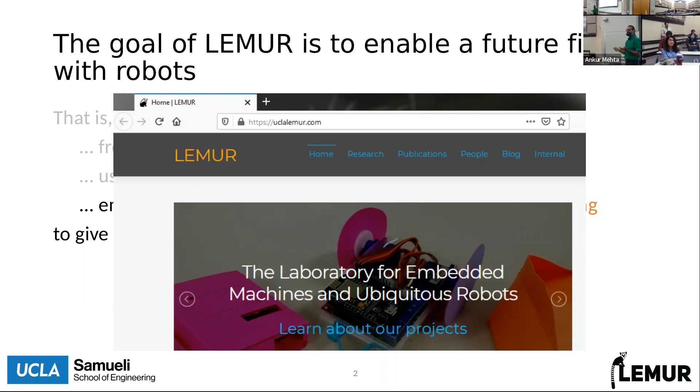And when I say all the other work, it's really the work done by my students. I just put a pretty face on all of this and come here and take all of their credit. So I'll be clear - everything in this talk is the work of my graduate and undergrad students that have been putting this together. Also, this is a good time to thank all the sponsors and ultimately taxpayers like you who send the money to government, who brings it back to us so we can work on all this stuff.

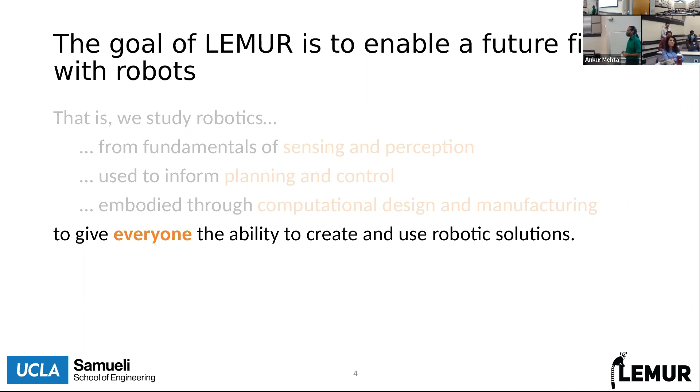Going back to this vision of our group, Lemur is there to try to democratize access, to get more people involved in the robotics story, to get people involved in the engineering process from start to end. This is where I'll start the first half of my talk, which is the motivation. Why is this so important? Why is this the driving feature that has influenced my academic career?

And like I mentioned, this is going to be a lot of social science, and I'll say I'm not a social scientist - I'm an engineer by training and by trade. So I'll present a lot of these things as an outsider looking in. This is going to be my interpretation of the data and information that comes through the social sciences field.

There's probably many other very reasonable, rational explanations for it, and my take is just one opinion. I'm happy to hear other opinions, and if you'd like more discussion, feel free to raise your hand. But this is going to be my view, coming from the perspective of an engineer who asks, what can I do about this? What abilities do I have?

This stems from the core issue of the gap, the divide between the haves and have-nots of society, and this divide is growing. We can look at it as a time rate in terms of income, where the highest earners make far more than the median or lowest earners. Integrating that over time gives accumulated wealth, and we still have the same problem: those who have wealth and income have a greater portion of the pie than ever before.

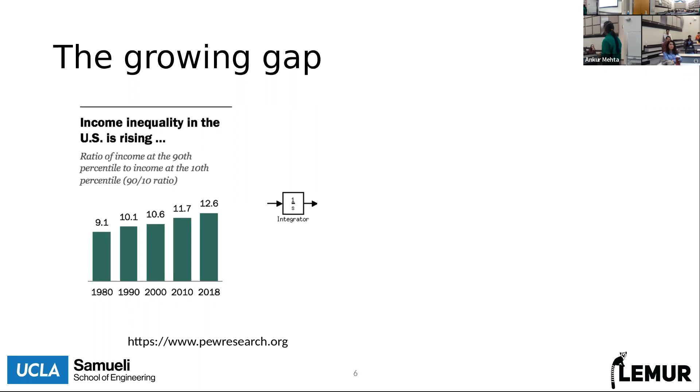But if you look at those who don't have, the bottom half of our society has even less than it's ever had before. These numbers are specific to the United States; if you look at the world, this gets very dire. There's always been some amount of inequality, and it's growing, but this is not just numbers, not just abstract concepts of money, wealth, and income. This has a real effect.

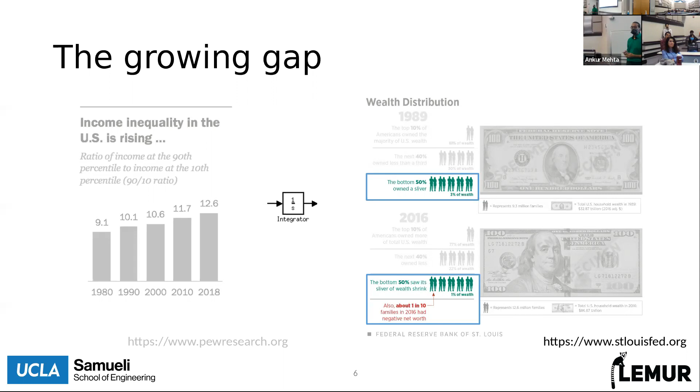Access to wealth and resources is very directly correlated to access to technology. Technology involves both hardware, like smartphones and laptops, and services—the underlying support for all of this. When I was young, you could have a computer without internet and it would still be useful, but right now everything is driven by networking, and that's gated by access to resources, income, and wealth.

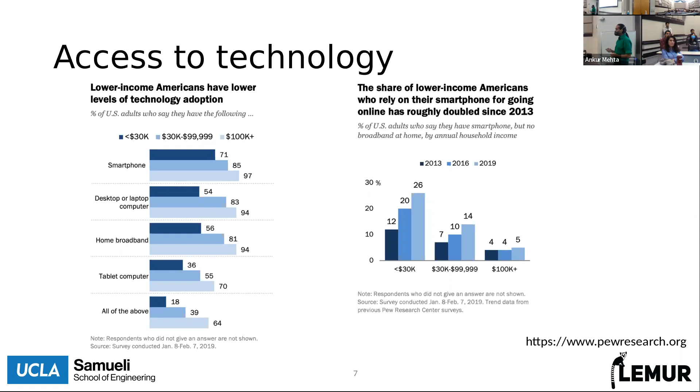This gets us to the core problem: technology leads to education. There's a lot of data up on the screens right now, and I want to focus on the correlation between the two graphs. The past three years of COVID-related lockdowns and pandemic shutdowns have been an unfortunate but revealing treasure trove of data, highlighting how important technology access is to educational outcomes. Comparing these graphs, you can see that with less access to internet-capable devices and internet itself, we have lower educational outcomes, lower learning.

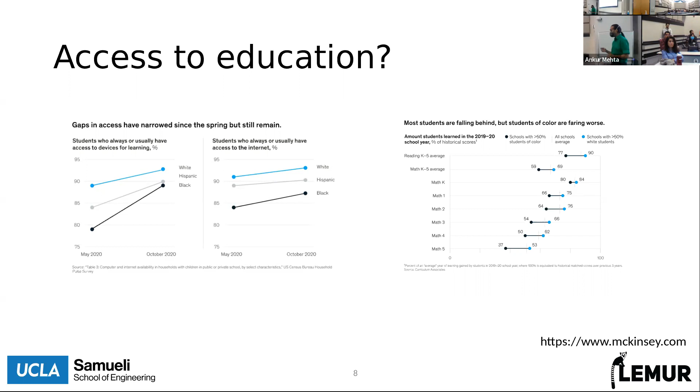Of course, the pandemic shutdown affected everyone, but those with lower access to education had lower results coming out of it. This is exacerbated by the original problem—access to resources, income, and wealth. This becomes a generational issue, where those who suffer impact from external limitations on education are less able to bounce back, given the lower wealth, resources, and income they have. Those that have not continue to have less.

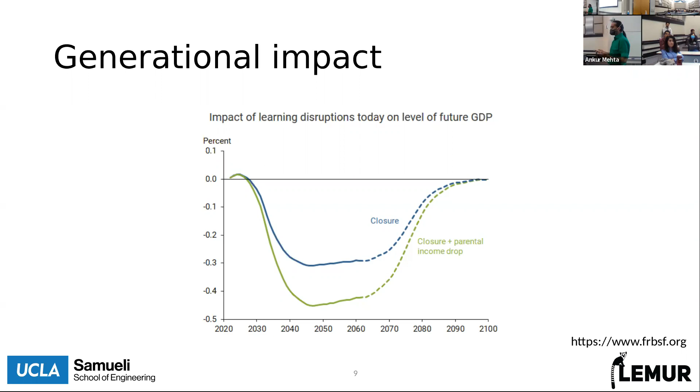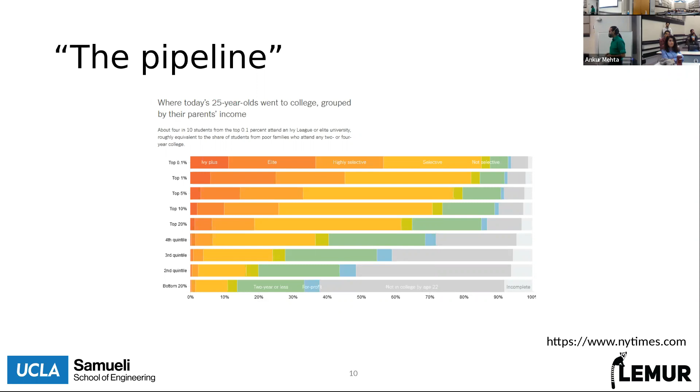Another way of slicing this is through the pipeline, where higher income communities generate higher educational outcomes, and vice versa. What this ends up being is a positive feedback loop: as you have more income, you have more access to education, you build more knowledge, and more ability to generate more. But the flip side is that with less access to resources, technology, and education, you spiral down. Positive feedback is sometimes desirable, but it means you rail out, and we do not want the have-nots to have nothing at all. At least that's how I view this.

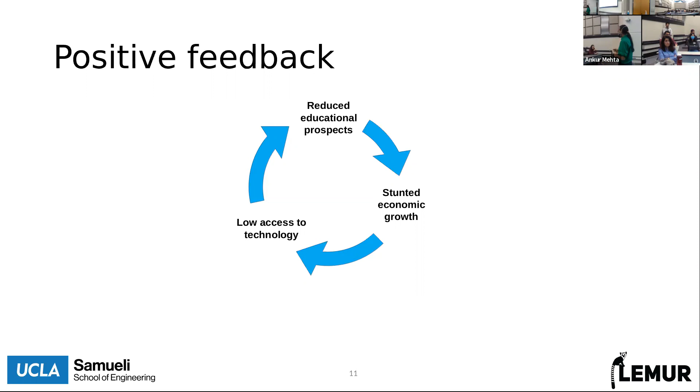With this somewhat bleak picture, I'd like to move towards a rosy outlook, but I'll make it one step worse first. It's not just about access to educational tools, technology, and education as a whole, but about engagement with that access. Even when lower income and lower resource communities do have access, they make less use of it—there's lower engagement. There are many reasons for this. I'm not a social scientist and don't claim to know all the answers, but there's a cause-effect relationship.

One thing that makes this a really big challenge is that it starts early, as early as kindergarten, some of the most formative moments of participating in the educational process. If you do not take part in that, the entire rest of the process suffers as a result.

And now, with all this doom and gloom, is where I come in and say there's hope. There is an opportunity to address this. Once again, I'll give my caveat that this is not the only solution, this may not even be the best solution, but it's a solution that I feel like I have agency over, and hopefully you all can build your own solutions in the same way.

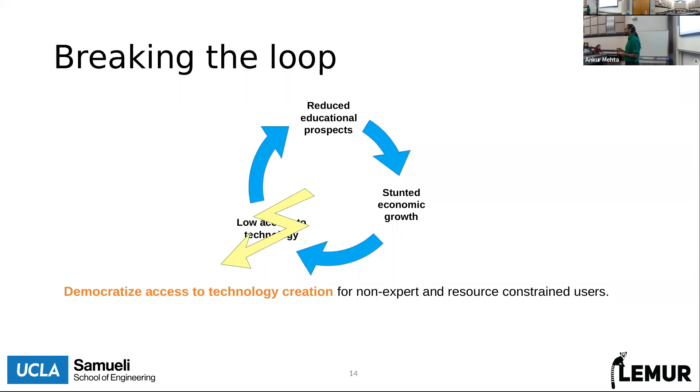That's my motivation, that's where I come from with the idea of democratizing access. But as engineers, we often tend to be driven either internally or externally by other motivations. This approach isn't limited to questions of democratization and fairness—there are real engineering values to this core motivation as well.

To illustrate this, I'll use a figure that my colleague Achyuta Kadambi at UCLA created, as a broader view of societal questions in engineering. It stems from the fundamental idea that engineering is all about trade-offs: if you improve some metric, there may be some cost to another. The horizontal axis represents engineering capabilities or outcomes, and the vertical axis represents social or sociological outcomes, and we can see a trade-off between them.

What I'm saying is that I'd like to focus on the vertical axis, to try to improve the state of engineering in that dimension. But as we do that, we push the Pareto front out—we increase the capabilities of engineering across the board. As a result, we should expect to see positive outcomes across any metric we care to evaluate.

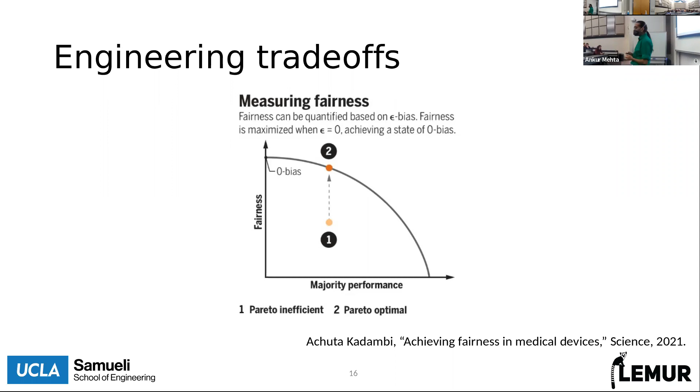As an illustration, I'll turn to this document from the 70s, the Philosophy of Unix. I'm an avid GNU Linux user, and I like this concept: the first point is, when you're trying to generate an engineering solution to a problem, solve that one problem and solve it well.

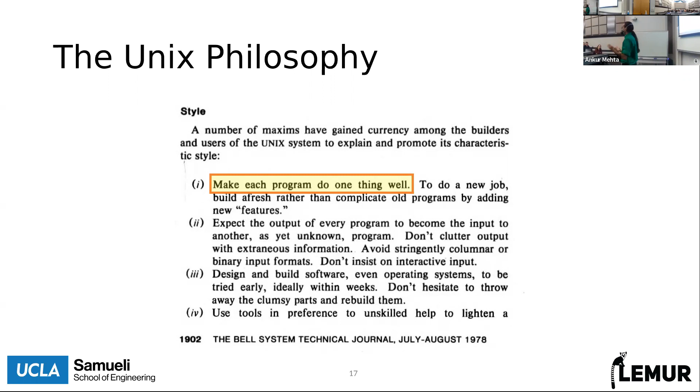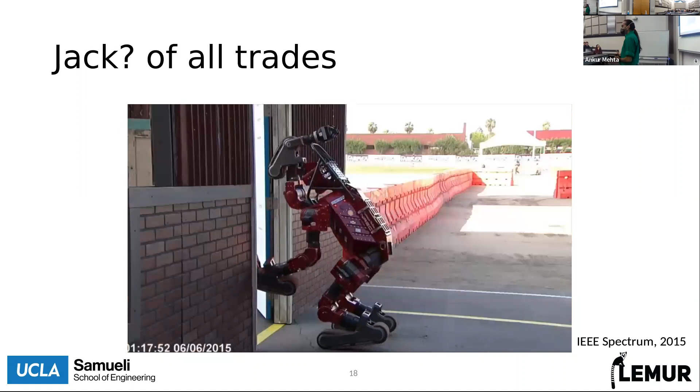As we transition to the technology portion of this talk, as a roboticist, we see the opposite of this very often. Here are some clips from the DARPA Robotics Challenge from a few years ago, where the core objective was not to do one thing and do it well, but to do many things. What ended up happening was that many things didn't get done well at all.

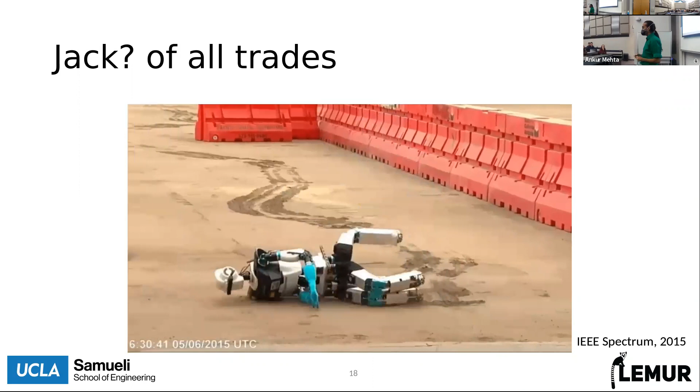Of course, there was certainly a lot of success in this challenge, but there were also a lot of setbacks. The reason this matters returns to that philosophy of Unix: part of development, part of engineering, part of generating successful outcomes is failure. Try, and if it doesn't work, scrap it and try again.

Try something new. When you have a single monolithic solution, like those Atlas robots for the DARPA Robotics Challenge, each one individually has a huge cost associated with trying, and when it fails, there's a huge cost associated with that failure.

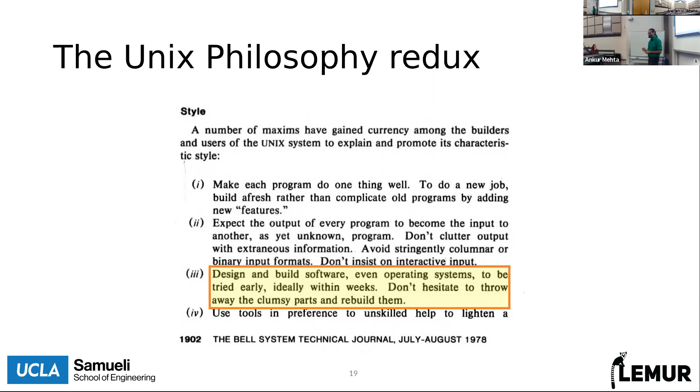This gives rise to the core vision of the central objective of a lot of the work we do in our research: using our abilities, our engineering expertise, and our research resources to give the ability to create to everyone else. The ability to design, manufacture, test, fail, and iterate, ultimately pulling all this together to make robotics cheaper, more accessible, more democratic, and ultimately more performant, with better outcomes.

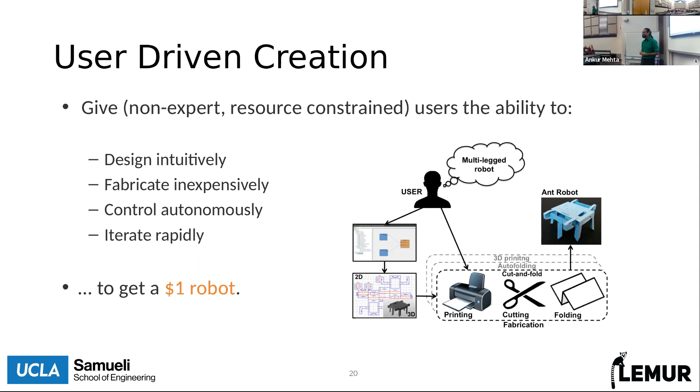So with that, I'll move into some of the technology that we've developed in our lab. Are there any questions though? This may be a good time to pause and talk about the motivation and the objectives behind where this is coming from.

Have you done any social experiments using your low-cost robots? Let's say, send them to kindergarten.

Yeah, that's a great question. It's great to have all this talk, and then we go off and do research forever - it doesn't really match. What we'd like to do is say, how does this really translate to some of these social concerns? We've done a lot of cursory experimentation, and that has resulted in knowing a lot of technological challenges that we're still missing.

So we've taken our cheap robots and brought them into a middle school classroom and had people play around with them. We realized that as a result of that, it was a great tool to maintain engagement. One of the comments we got at the end from a teacher was: this was the first time all year we've gotten our students to pay attention to the same activity for an hour straight - a huge amount of engagement.

We weren't quite sure if they came away from that with any advanced learning - did they get anything out of that experience? We realized there was a lot more that we had to do to enable that kind of learning, which led to some more research on that field.

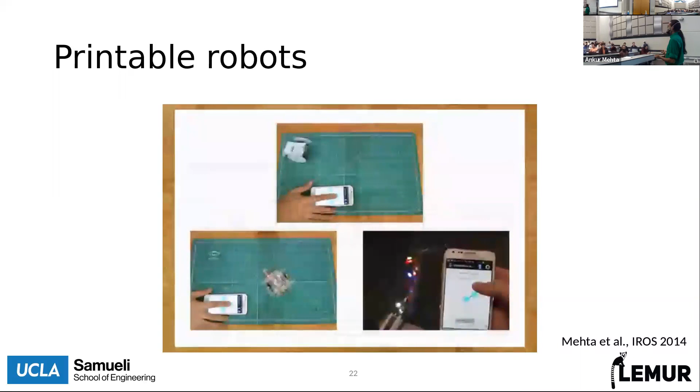The quality of the video shows that this was 7 years ago. It was this idea that we have a bunch of robots we could make at home using low-cost materials. In this case, it was folded paper, and being folded paper, I'll also be using the term origami inspired - it's cut and fold manufacturing with paper.

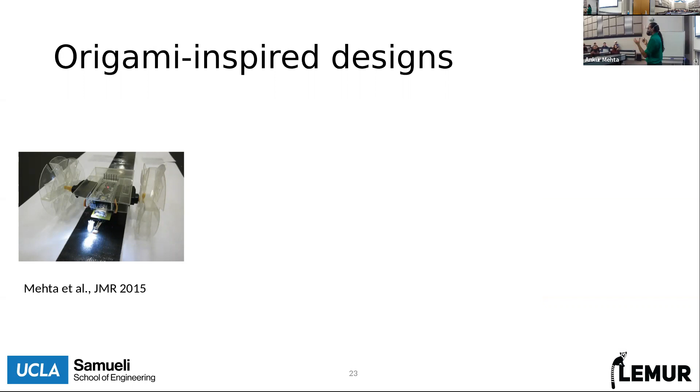What we did was take this entire concept of a robot, which has this structural embodiment, and made it printable - that is, we made it out of paper. You take a sheet of paper, cut it up, fold it up, and you can build that robot body. We had robots that wheeled around, walked, and manipulated the environment. We had other kinds of robots, and ultimately we took the structural body down into a very low cost, low infrastructure way of manufacturing. But that's not all a robot is.

A robot has many other components, in particular the things that give it intelligence - the sensors, actuators, and controllers - that in the past we would use discrete electronic components to put in there. This provides some of those barriers to access, because you need infrastructure to get access to those things. They may be low-cost controllers and electronics, but you need a supply chain. You need to know how to use these things - about electrical wiring, and how to test and debug them.

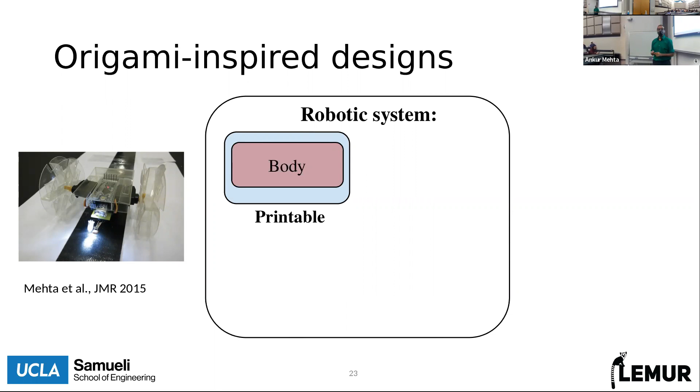There's another part to the robot, which is the power source—in this case, a battery. We're not focusing on the battery; that's a much harder question. We're doing some collaborations trying to get power onto these things, and some newer work that doesn't use electrical power as a battery. We'll say there's some power source we can throw onto here, but ultimately we'll take the rest of the robot—the intelligence, the thing that makes it a robot—and wrap that up into the printable paradigm as well.

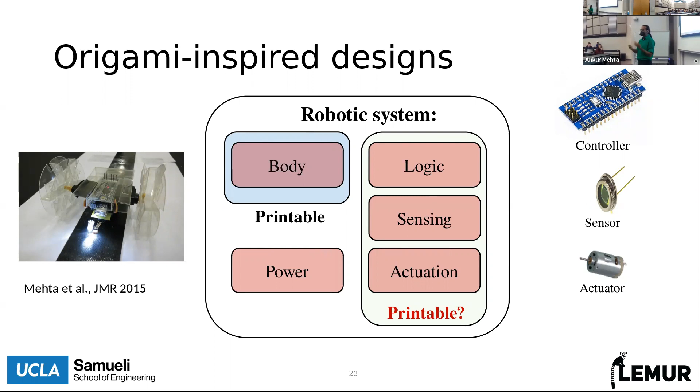The way we do that is by taking our body, made out of paper—basically any thin film material you can pattern with 2D manufacturing techniques, a fancy way of saying scissors. We augment that with a new material that's similarly accessible: nylon sewing thread. To make our lives easier, we use conductive sewing thread—nylon sewing thread covered with silver paint. It's still a very low-cost material, though being conductive makes it a little less accessible.

There are workarounds we can play around with, like putting conductive wire parallel to the thread. But ultimately, these two materials together give us a pathway towards fully printable robots—all of this, minus the power source, integrated into a low-cost, easily accessible manufacturing technique. But we need some careful engineering design to make this happen.

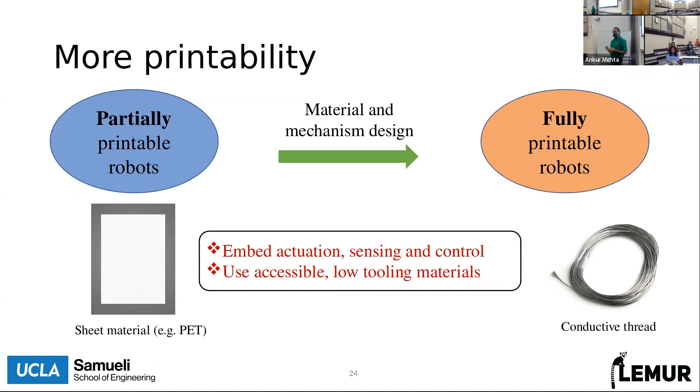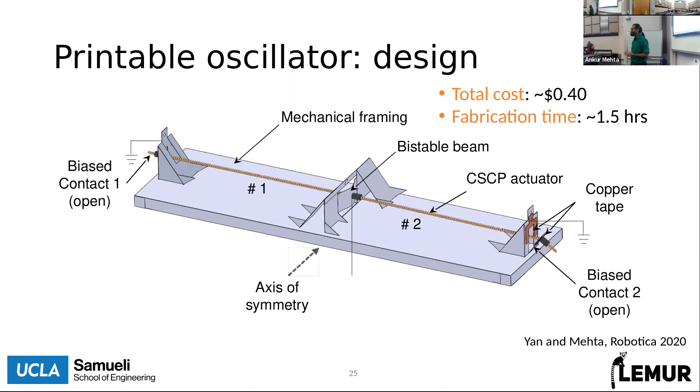The one downside, the trade-off of a low-cost device, is that it takes some time to assemble—after one or two practice tries, you can get down to a little over an hour. But ultimately, this is moving in the direction of accessibility, of minimizing the barriers. I'll show you how this works in action.

A constant power is sent in, and what happens is there's a mechanical process, an electromechanical process, that causes the middle element—the active structural element formed out of paper—to oscillate back and forth.

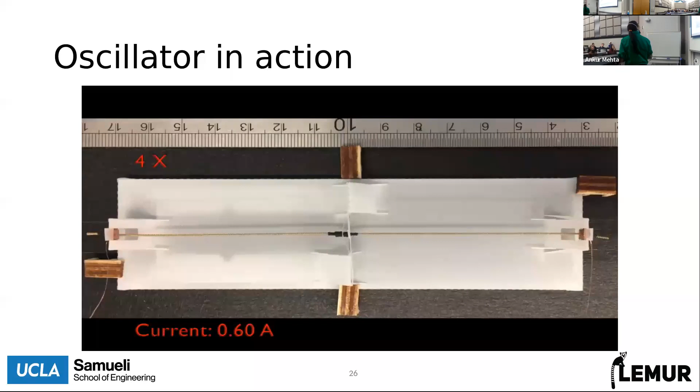The general principle behind it is that the conductive sewing thread, the nylon, is a thermoplastic material. The paper body gives it a particular structure so that when the middle beam is flipped to one side, current flows through the actuator on that side. It's under tension, current flows, and it heats up.

We don't necessarily need it to be conductive, as long as there's some way of flowing current, perhaps by a wire instead. Resistive heating causes it to heat up, generating tension that pulls the active element towards the right.

It pulls in on that until, at some point, the active element—a bistable beam, a buckled beam built out of paper exploiting the properties of thin film—snaps through and flips to the other side. The string that was under tension is no longer under tension, no longer maintains electrical contact, no longer heats up, and starts cooling down.

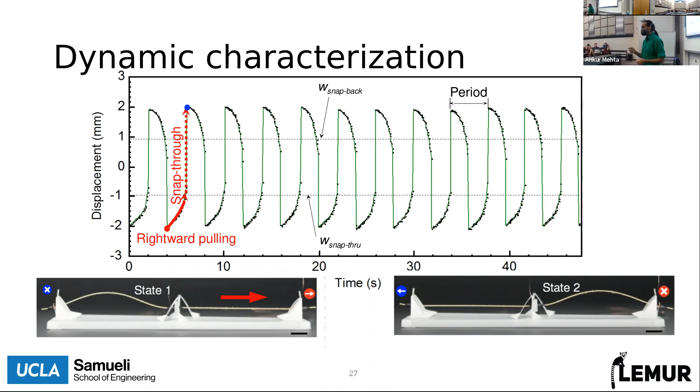The other side, the other contact, is now connected, generates its own current, conducts its own current, generates its own heat, starts applying its own force, and eventually also snaps through. You get this oscillation—it flips back and forth from a constant power supply. This is the rudimentary beginning of some kind of printable intelligence, programmed behavior. It's very simplistic behavior, but it doesn't stop there.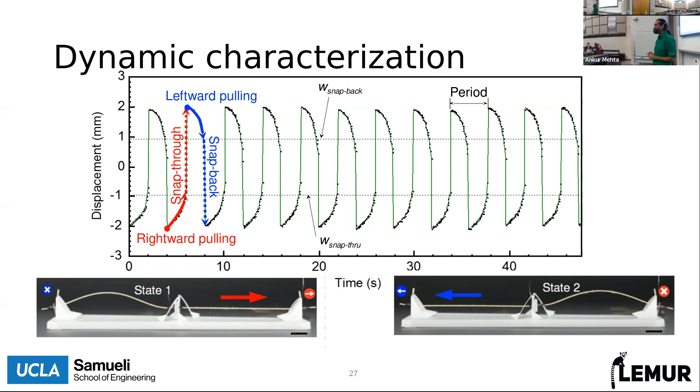We can turn this active element into a robot, into an actual system we can assemble. I'll give one example that builds off that structure, making more use of the material properties. Recall how increasing accessibility by making this out of paper also generates value in terms of performance.

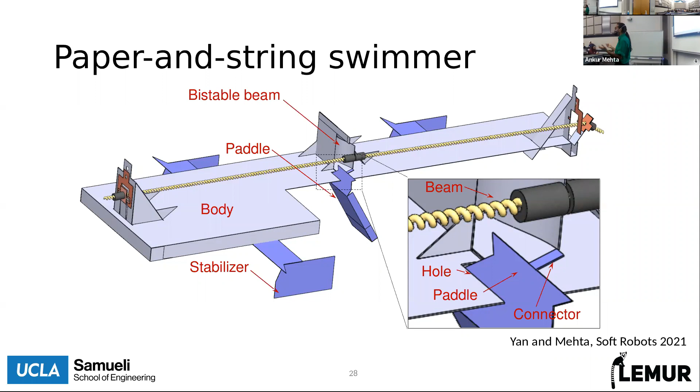We use the material properties, the flexible substrate, to build these linkages, connecting that mechanical oscillation directly to a driver, something that generates motion. Within the same mechanical structure, a single manufactured process, as the beam moves back and forth through the linkage, you end up with a flipper that flaps up and down, generating forward thrust.

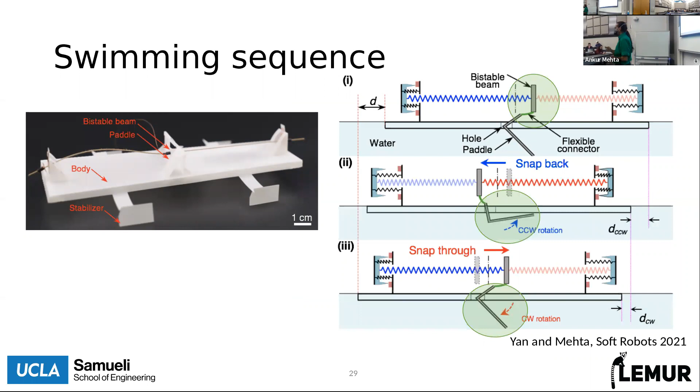Here you can see the robot itself without any current—it stands still. As you feed in a constant current, the flipper starts oscillating, and you get this thing moving. You now have a robot made for a few dimes—the overall cost was 40 cents. Since we're putting it on water rather than paper, which gets waterlogged, we used a polyester sheet, thin film plastic, and this conductive sewing thread.

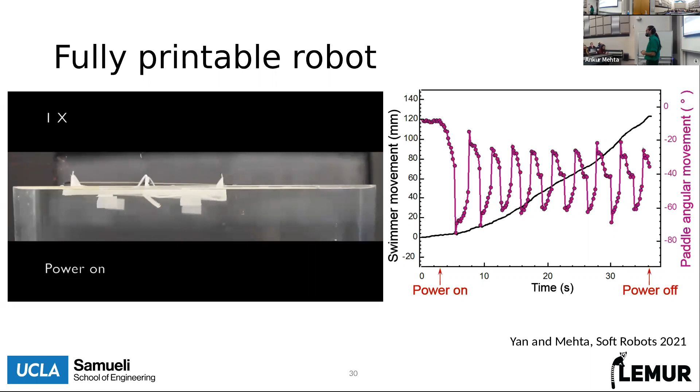We can use this same idea for a different kind of robot. This is now a robot that crawls over land. We added some additional material to it—basically more weight to the bistable beam in the middle.

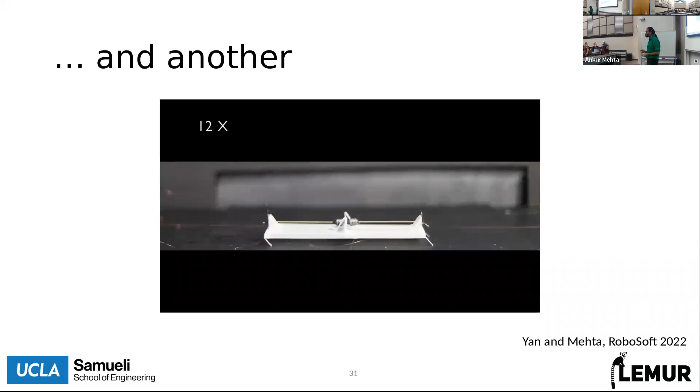Now every time the oscillator switches back and forth, it generates a little bit of an impulse. Using the properties of the material, we're able to generate asymmetric friction. Every time the oscillator flips back and forth, it generates a pair of asymmetric forces—one is canceled by the friction, the other propels the robot forward.

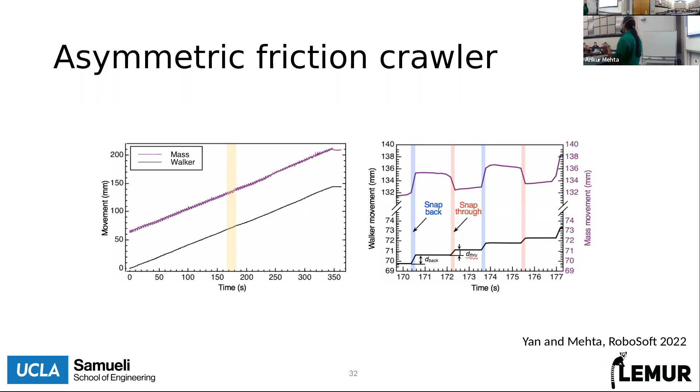This oscillator isn't just a mechanical oscillator. We showed two examples of using the mechanical oscillation as power for a robotic system, but it also opens and closes electrical contacts, so we can use that electrical oscillator as part of a larger electrical system. These switches, as they go back and forth, can connect to whatever else we want in the electrical domain.

In this case, we're just going to use LEDs as an example, and using a single constant power supply, this will make some kind of animated display. And of course, it has some amount of programmability—by changing the current, you can change the rate of oscillation.

There's a lot more you can play around with here, both in terms of mechanical design and electrical design. And we can start thinking about assembling this into higher order creations.

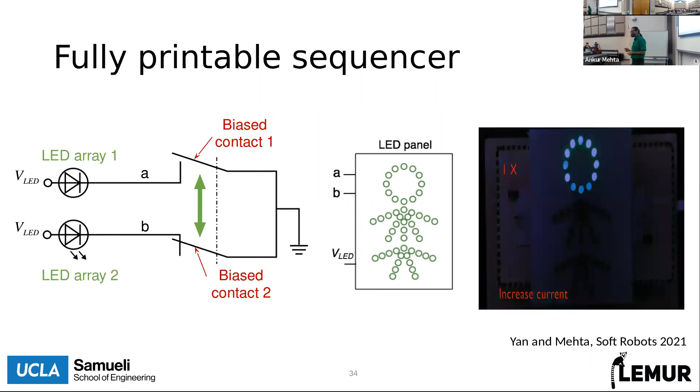We can use this system as the base, not just of oscillations, but now we take that and translate it to larger scale intelligence. We can use this as the base of logic gates. In this case, we can make a multiplexer, and a multiplexer is a universal gate, which means we can cascade them to make a bunch of further logic.

We can start with a very simple NOT gate. You can take any kind of sensor input and invert that to generate some output. We can generate any kind of other gates, and cascade gates to make larger logical sequences.

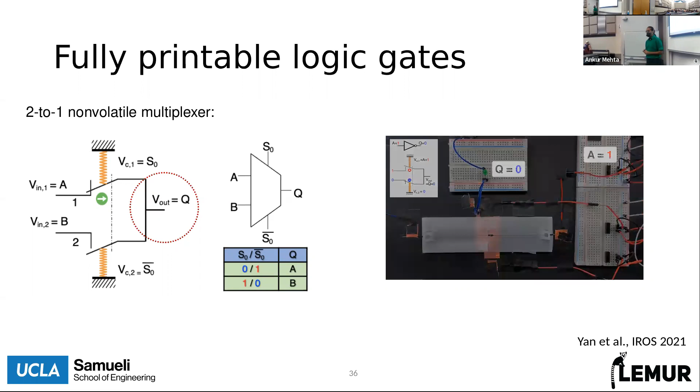We've done so and wrapped this up into robots that have much more capable intelligence, with sensors that we can print, process using Boolean logic, and then drive in various ways through the outputs.

Now this is all well and good if you want to make paper robots for really pretty videos to show to a bunch of students. But going back again, there are other engineering benefits to this. One thing this becomes useful for is designing robots that operate in harsh environments. These robots don't have any silicon at all.

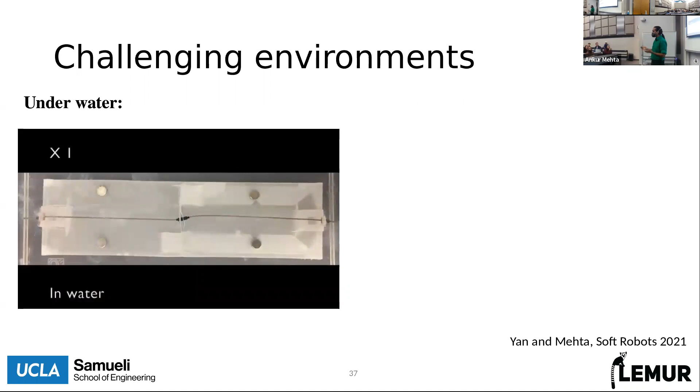There are no discrete components, so we can put this underwater and it will work just fine. In fact, it works a little better because water is great at transmitting heat away from the thermal actuators. We can put this inside a magnetic field.

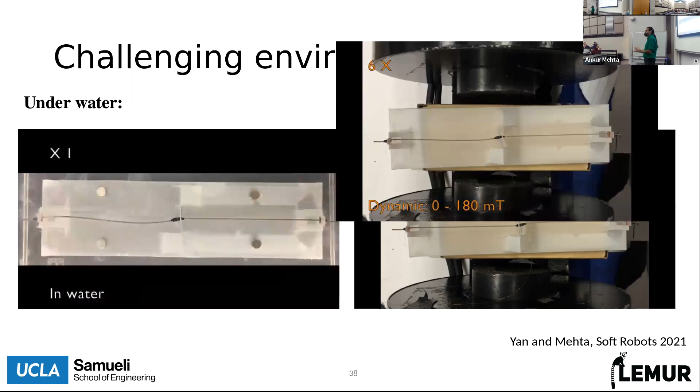You can think about robots that operate inside MRIs or other NMR-based machines. Again, without any silicon components, we now have a much broader range of environments where before we didn't have robots that could work well, but these paper and string-based robots can do just fine.

I had a few other conversations earlier today about not just magnetic fields but other radiation fields—thinking about how you can run these in environments with strong microwave radiation, or perhaps other kinds of fields, where again, without silicon, these things are not impacted.

This is sort of the basis for our most recent award from the DARPA YFA, which says not only is this able to operate in harsh environments, not only is it able to be designed and built on the fly by people in the field, but without any semiconductors or silicon-based electronics, we now have a little bit of inherent security—we're not reliant on semiconductors coming from overseas, and we're not reliant on shipping lanes being open and supply chains.

We're not reliant on validating a whole bunch of really inscrutable pieces of silicon to make sure it does what we need. There are all sorts of interesting directions we can take this work, building toward making mechanical intelligence provide value, not just for lower cost robotics, which is what I care about, but for a whole range of enhanced performance for robotics that may be interesting to a wide variety of people.

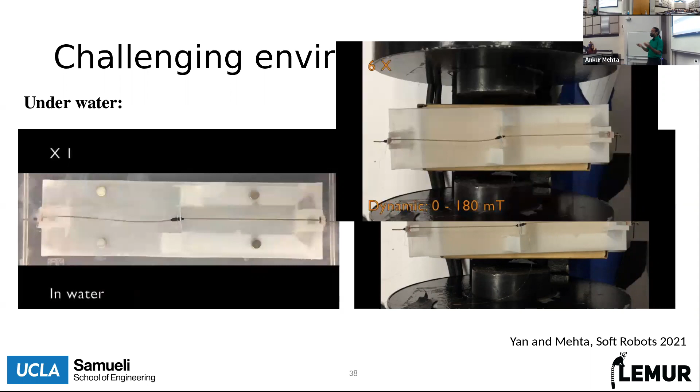Now, with all of this, there's the question of building the robots, which I talked about, but there's also the question of design. I mentioned that they can be designed by people on the fly. Up until now, this idea of printable robots, printable robotic design, has been driven by experts. I used to be the expert, now I defer to my students—they're the experts, the PhD students in engineering who put together these designs.

That's because it comes from a lot of validation. We're trying to accomplish some sort of behavior, and these are complex mechanical systems. We need to validate their performance, and a typical way to do that might be to use numerical methods like finite element analysis. But these tools are very difficult to use, very difficult to spin up on, and getting access to them plus using them requires that expertise.

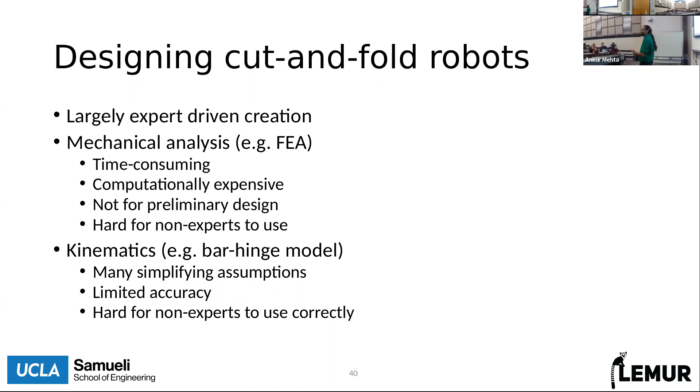That's not the only way to do it. You could instead use kinematic low order mathematical models, which are a lot less computationally heavy and don't require any custom tools—you can write these in Python—but the results are not very good. And now you need expertise again to interpret what that means: is your robot going to do what you want it to do? Do you need to change your design in some way to accomplish your goals?

Pulling this all together, we now have a new challenge, which is: sure, somebody can build these robots on their own at home with available materials, but what are they going to build? How do we map the design intent—somebody who has something they want to build—to the actual performance we're going to get out of the system?

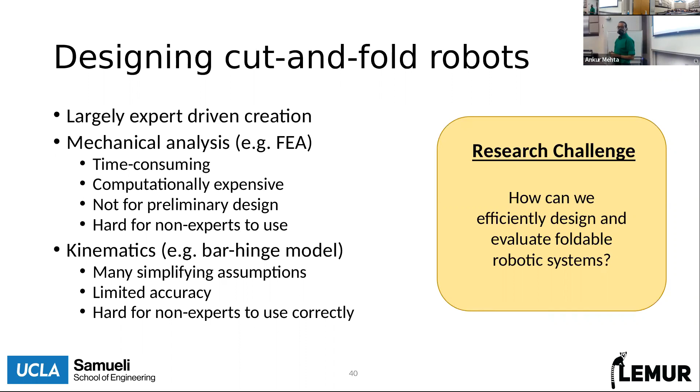We can use that previous robot or mechanism as an example. We have this oscillator that we're trying to get to oscillate back and forth, and we can imagine that one behavioral property of this may be the period of oscillation. This is a broader view of how we can think about the design process. We want to characterize this design, which consists of a mechanically buckled bistable beam and a thermal actuator—the thermoplastic conductive actuator—together in this integrated system, to make this performant measurement.

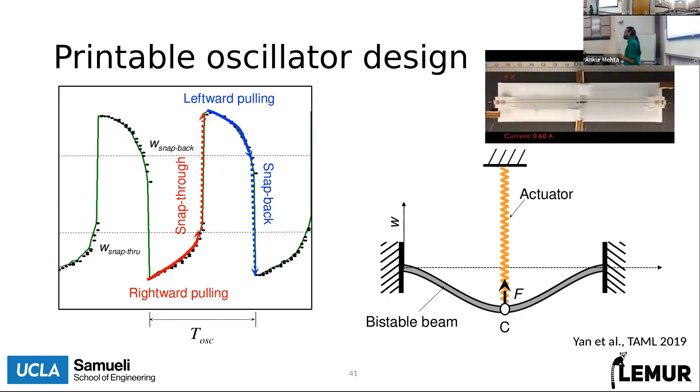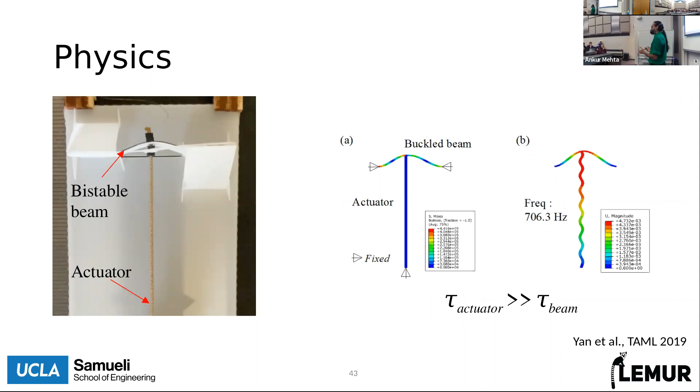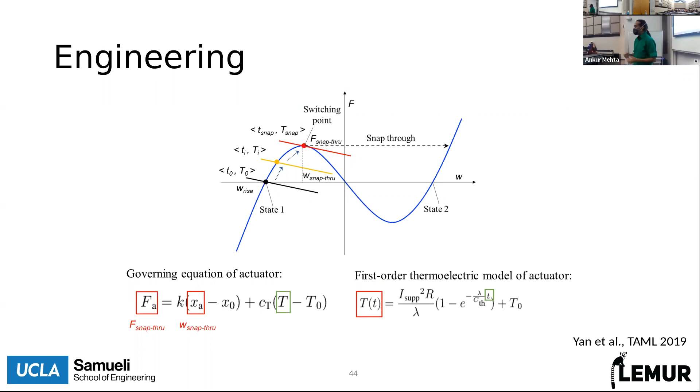Now, how do we go ahead and do this? This is where there's a bunch of math involved—really complicated differential equations. We can put this through some physics and talk about how the behavior of the materials across different domains comes together, throw in some engineering in terms of low order modeling, approximations and assumptions, and integrate it all together. In three slides I cover about two PhDs worth of work, and we have results: we actually know how to characterize the system and map the design parameters—what you'd need to do to build the system—into the behavioral parameters, what you want the system to do.

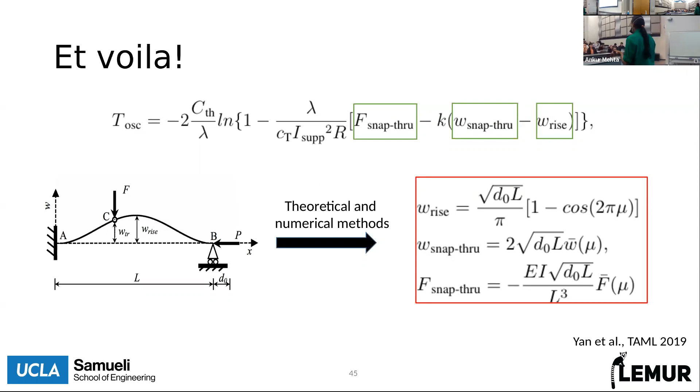So clearly, you can all take a look at this and see exactly how to design your next bistable oscillator. Except not really, because that's not anything anybody is expected to know. This becomes a tool, a framework that we can throw into a computational tool. It's not designed for human consumption—we, as the human engineers, the experts, pulled it all together to wrap it up into something that's computationally tractable, so somebody can just throw this into a computational optimizer, a numerical optimizer.

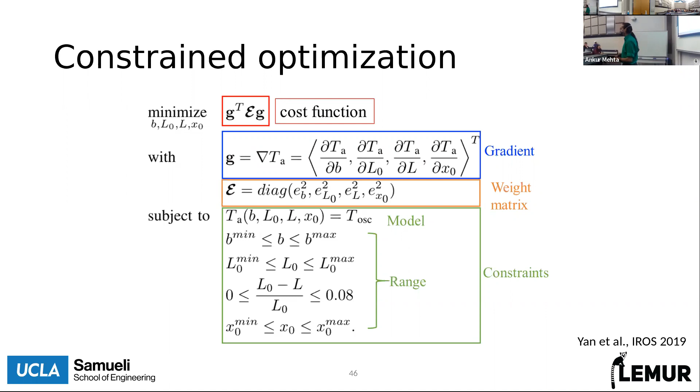We're not an optimization group—we didn't come up with any optimization tools. Any off-the-shelf optimization will work on this. It's a constraint optimization problem, and generic constraint optimization has been around forever. We can throw this into something like Fmincon in MATLAB or Python—SciPy has its own variant of optimizer—and we can now use this as the design approach. So we can say there's some behavioral objective we'd like to meet, perhaps a specific period of oscillation for this oscillator.

And we need to figure out the geometry, the design that we need to manufacture, all the lengths of the pieces that we cut out and fold up in our printable process. Because this is an optimization, we can set some optimization target.

In this case, we may talk about robustness. We want this to be accessible. Maybe you have access to a high performance laser cutter with very high precision manufacturing. Maybe you don't, maybe you have scissors and you're trying to draw this with a ruler and cut it out. You're going to have some error in manufacturing. We want this design to be robust to that error. Throw this through an optimizer, and you'll get an example.

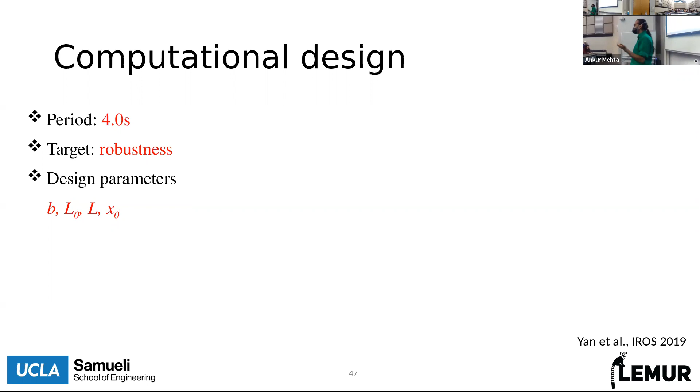This is in contrast to, perhaps without using any design tool, you just play around with some designs and came up with some other set of geometries that got that same nominal performance. But under the same variations in manufacturing tolerances, you get a much higher variation in output behavior. So this is an example of how we can throw our engineering knowledge into the pipeline.

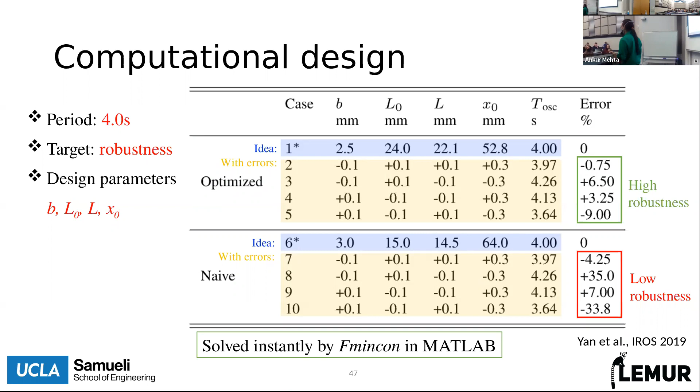To be able to simplify design for future designers. And I'll say this doesn't necessarily need to be just a single forward pass on design. We can turn this into an enhancement pipeline where there may be an existing design that somehow doesn't work according to the designer's intent. I'll give a specific example from a separate research project, where we're trying to build blimps, lighter than air vehicles, big helium balloons that fly around.

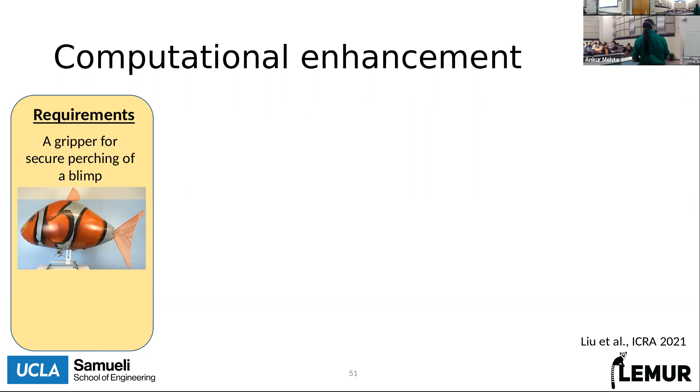They need to perch every once in a while, so we wanted to get them to grab onto a railing and stop there. When you do that, it turns out you have a large amount of force, the wind blowing on the balloon, concentrated at a very small place, the gripper, and we wanted to build these lightweight grippers. Again, another value add to low cost manufacturing - it's also low weight manufacturing. Folded paper is very lightweight. It works on blimps, but it's not very strong, and you can see that under wind conditions, the blimp fell off of the perch.

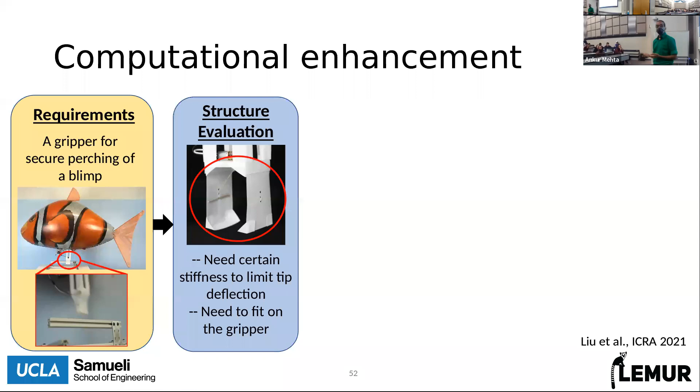We can go ahead and use our computational or mathematical understanding of the system, our low order models, to run this through a computational evaluation tool that will identify that the source of the problem is weakness in the structural material. This weakness can be enhanced - we can strengthen it using corrugations. By folding paper back and forth, we can get a stronger, more rigid structure. However, doing so adds more paper.

The whole reason we were trying to build this out of paper in the first place was to make it lightweight enough to fly on this lighter than air vehicle that has single digits of grams of payload capacity. Ultimately, we can put it all together and figure out the right trade-off across strength and weight. Again, with this computational optimization tool, we can build a much stronger gripper that doesn't blow off with wind, and it's light enough that when we let it go and fly around, it doesn't weigh down the overall system.

So what we've done here is we're taking our engineering knowledge and wrapping that up into a computational development tool that enables other designers to do the design. Now, when we talk about this, there's still the designer - the human needs to be a part of this design loop. We don't want to remove that, because that's the whole point. We want to get more designers, more people participating in the process.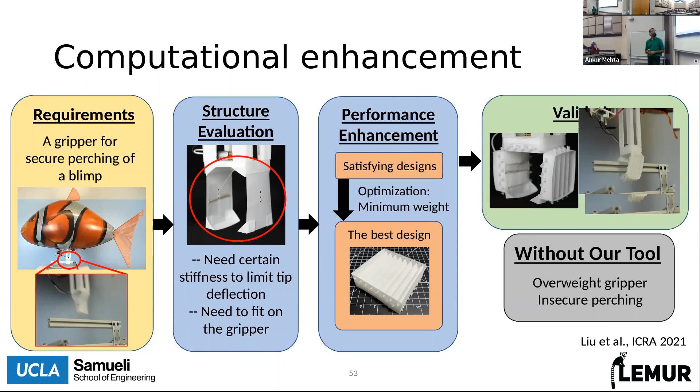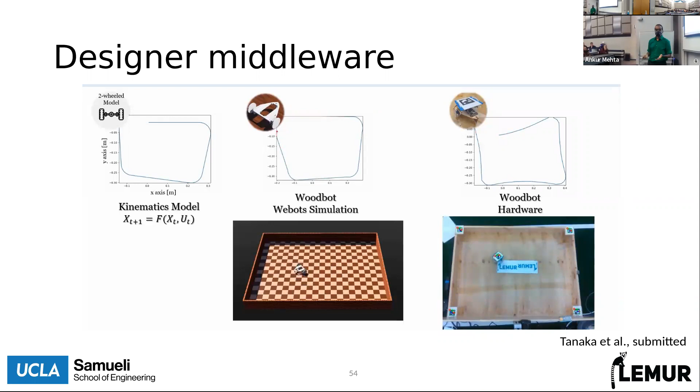Now, when we do that, we want some way of evaluating. Auxiliary things that come out of this include a middleware platform where, in order for us to do the evaluation, we need to figure out how to map the computational models, the numerical and analytic models, to the real hardware that was developed. We do this for testing our systems, and it becomes very helpful for people to see how we can correlate the physical devices we built with the design we intended to create. This becomes a way for designers, the people in the loop, to rapidly iterate over designs - do a bunch of designs in the computational system, then realize that in the mechanical system.

If it fails, identify where things have gone wrong, address it, fix it, and change it in the sort of try early, try often, fail, and iterate process.

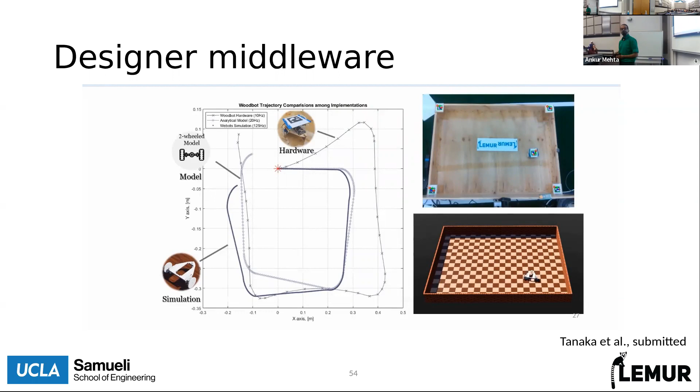Again, this comes back to the idea of hidden benefits, of additional value. We can take this thing where initially we'd talk about having a designer iterate through their designs, iterating on the design until they found something good.

We can put this into a learning loop and talk about residual learning, and figure out why our low order models, our computational models, or even our physics-based models don't match reality. We can come up with a new learning-based model to better understand how these low-cost devices end up working out.

This becomes another platform we can build on going forward, thinking about how we map our computational understanding of these low-cost electromechanical systems to their physical instantiations.

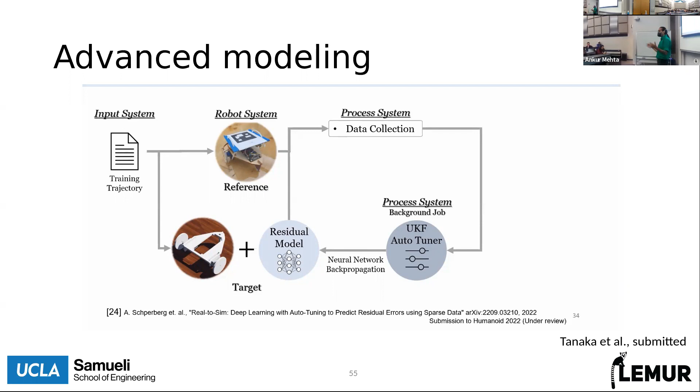This is all designed for behavior, designed for functionality. We can also think about design for manufacturing. Not only do you need to create a system that behaves the way you want, but before it can behave, it needs to be built, and it needs to be made in a way that you can assemble it.

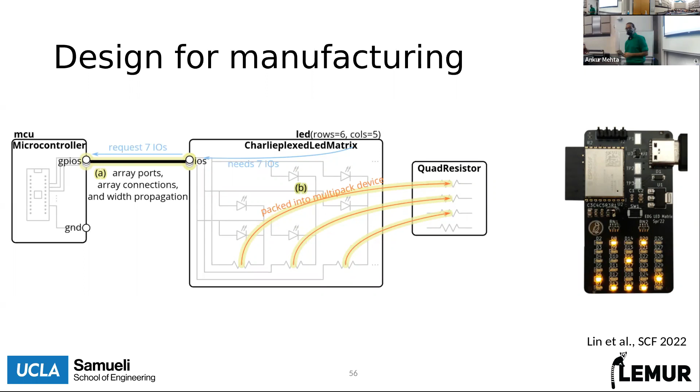Ultimately, as I try to keep to time, this is the approach we take for many different projects within our group: taking an engineering problem that needs solving, and figuring out what the barrier to access is, what resource is currently limiting the successful solution to that problem.

We take that resource and figure out how to build a computational model of the mapping from that resource to the problem, then turn that into a computational pipeline for human-in-the-loop design.

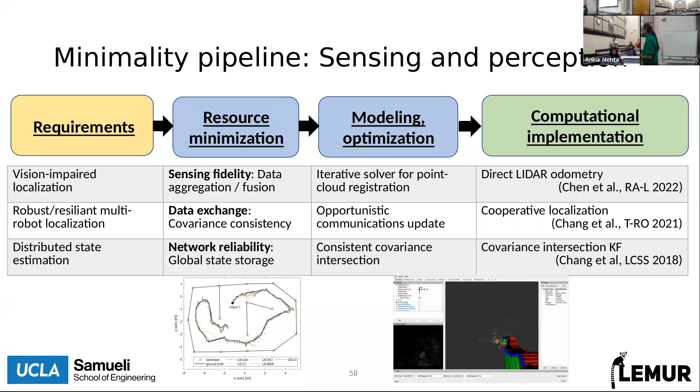We can do this for a variety of robotics problems — in this case, some of the input side of robotic development, and similarly for some of the output side of robotic development. I'm happy to talk more about any of these, so feel free to ask me questions.

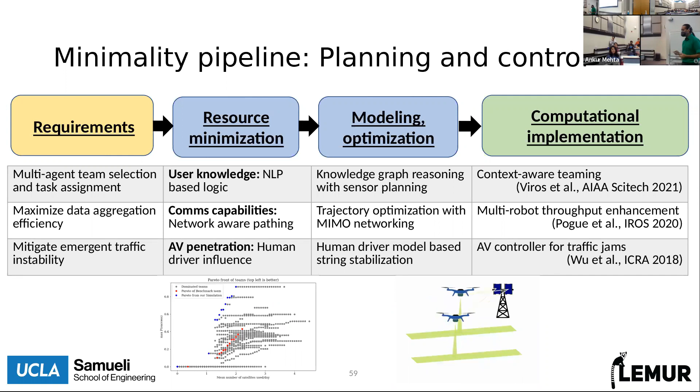All of these are projects where we start from the idea of improving access by lowering resource costs, running it through a computational design and fabrication pipeline, and ultimately ending up with that core vision: taking our abilities and resources as engineers and researchers to give the ability to do research, to do engineering, to create, to everyone else in the world.

So I appreciate you listening. Thank you for your attention. This is a time for questions — I would love to hear from you. What were you inspired by? What did you take away from this? And how can we work together to build a future that really benefits everyone? Thank you.